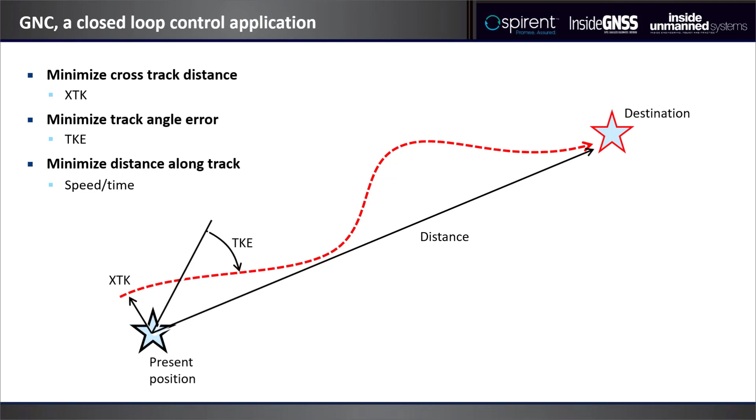And you will see that the most important variables are then the cross-track distance. Are we on the desired path? Then obviously we have the track angle error. Are we proceeding in the right direction? And then finally we have the distance to go, which I drew as a line here, but is actually the distance over the reference path, the along track distance, which is not just the distance, but also the speed and time attributes that we're going to derive from those. So this, in a nutshell, is the guidance, navigation and control system.

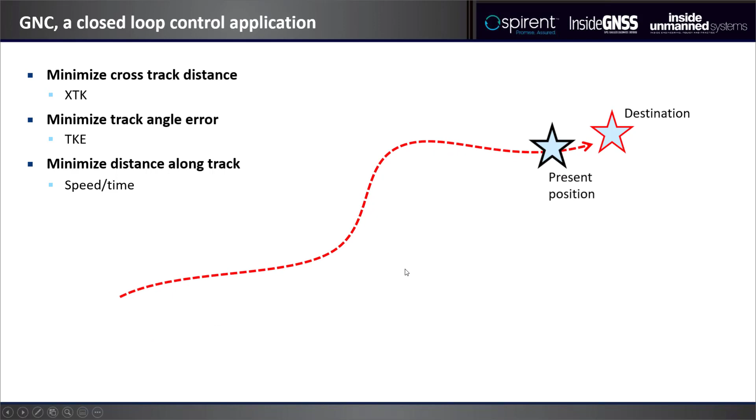And if we are going to make that a bit more formal, then we can show it as a closed-loop control system with at the top the reference trajectory, which is the string of intended positions, the estimation of the current position, which is obviously tied into the sensors. Then we have to generate the control error and bring it down to the guidance and control functions so that it can act on the aircraft in order to influence its current state, and by that the sensors which pick it up and close the loop in that way.

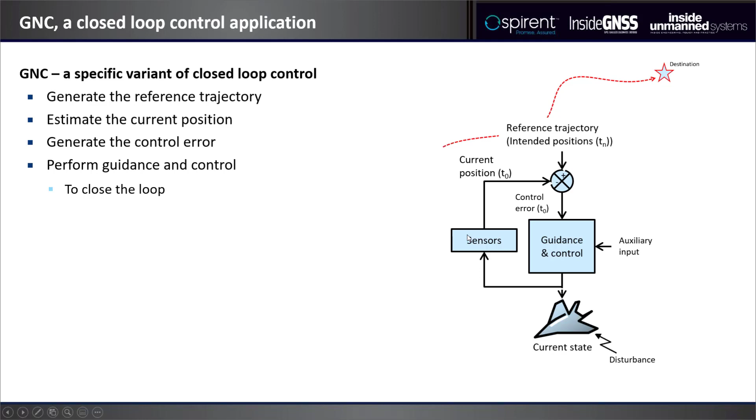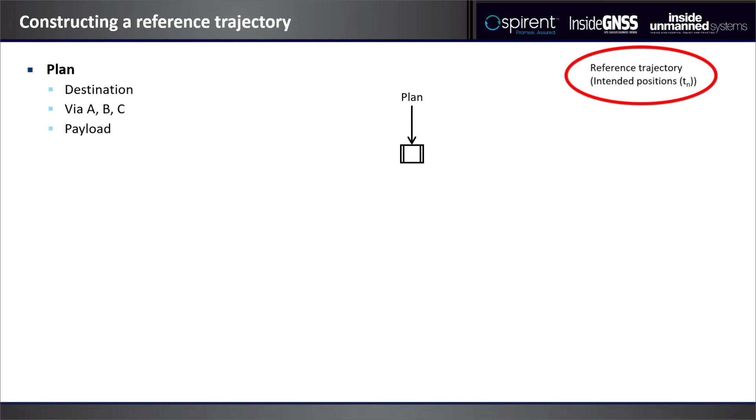Let us think about the reference trajectory for a second. It starts out with a plan, which obviously includes a destination, and then maybe some interim positions like waypoints A, B, and C, and obviously there's a payload. The payload could be a cargo, or it could be a camera that you need to bring somewhere, or it could be another type of sensor or other device. Next, in terms of the reference trajectory, will be the aircraft and engine data that we are going to need in order to refine the plan to a more appropriate set of attributes that allow us to navigate.

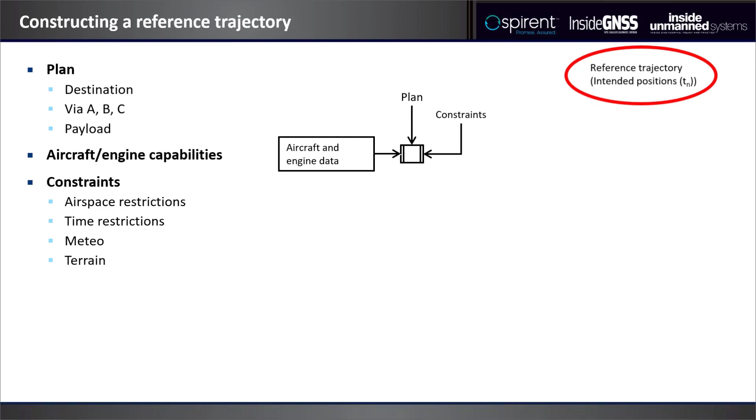Very important are the constraints. There could be airspace restrictions or time restrictions. There could be winds and turbulence or other types of weather, and we have to make sure that they are properly included into what finally becomes the reference that we are going to navigate to. There shall be a navigation database. There are certain points in our navigation problem that we have to have attributes from, like certain waypoints, and jointly we then run a forward simulation whereby we exercise the plan, we respect the constraints, we use the aircraft and engine data, and we generate a reference trajectory.

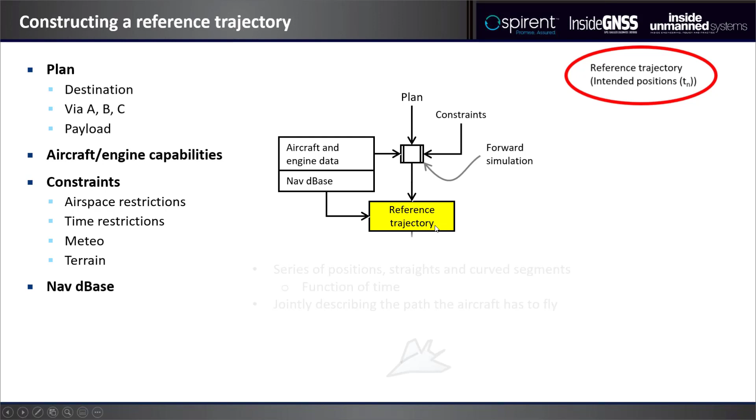And this then is the series of positions and straights and curved segments as a function of time, which then jointly describe the path that the aircraft has to fly. And this is a very important thing. If it is not right, then we will accurately go to the wrong location, which is obviously not the idea.

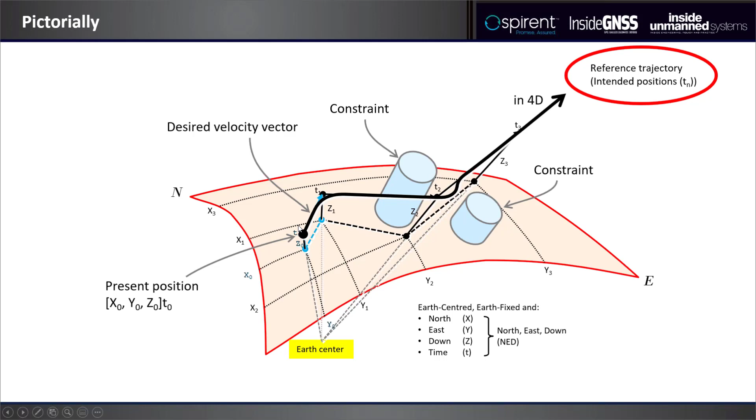To make it a bit more complex, we're navigating over the Earth, which is a sphere, a globe, and therefore you will have to express these coordinates in Earth-centered, Earth-fixed nomenclature, so that our present position, just like any other position, will receive an X, Y, Z and a time. So basically defining those in 4 dimensions. The constraints are similarly expressed in those same types of coordinates. And so that then is the basis for the reference trajectory, which is then in 4 dimensions the path in space that we're going to have to fly. And obviously the guidance and control system develops the desired velocity vector from that and is able to then steer the aircraft along this reference trajectory.

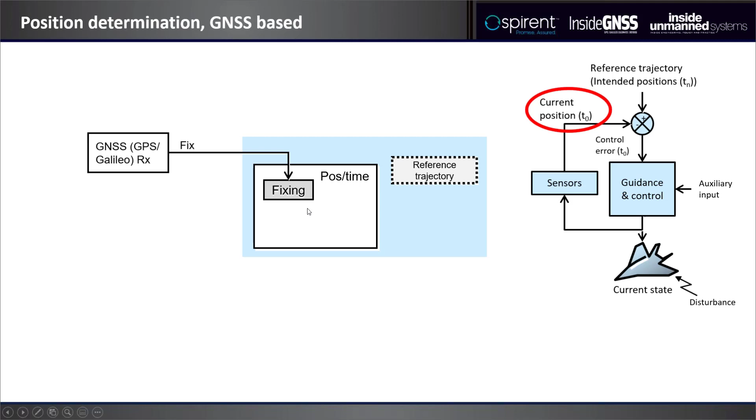So then moving to current position, the reference trajectory, as we discussed, is going to have to be compared, if you will, with the current position in space. And we can then use a GNSS receiver, which is either a GPS or a Galileo, or maybe even a dual constellation machine. And we can decide to then augment that using a space-based augmentation system. And there are other types of augmentation, but this is one.

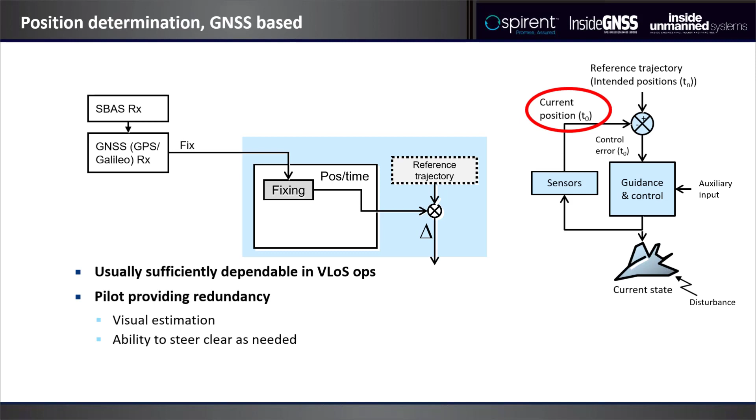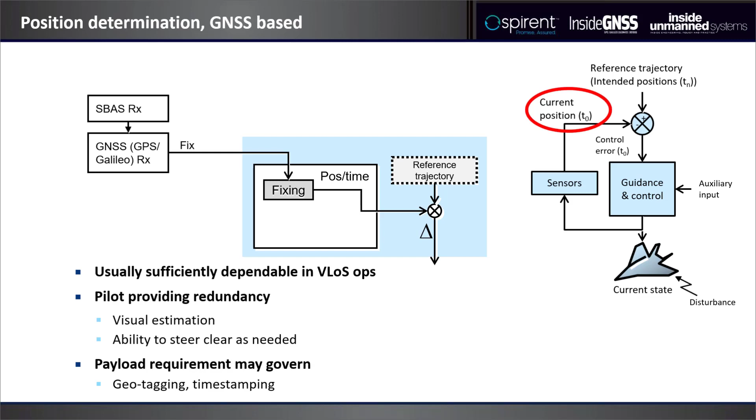And this set will actually produce a fix of where we are, so that we know at that particular instant where the aircraft is. We can then equate that to the reference trajectory, generate the control error, and basically offer that to the guidance and control system. This arrangement is typically sufficiently dependable for visual line of sight operations, and it is because the pilot sees the aircraft and provides redundancy in terms of visually estimating where it is. He is able to steer clear, and the requirements may actually be governed by the payload in terms of geotagging or timestamping or directing a LiDAR to a particular location.

Now, if that is not sufficiently dependable, we can add a dead reckoner, so to say, and we can complement the fixer with the dead reckoning. And in dead reckoning, there's again two shades of gray, if you will. There's one that will use the velocity vector of the aircraft, like air data plus heading and so forth. But then there's also an inertial version where we measure the X, Y, Z accelerations in order to determine how the aircraft accelerates in the X and the Y direction. Obviously, we have to correct for attitude. There's a whole range of other corrections that we'll not dwell into, but this is the primary set of measurements that we have to make, and then we can successfully perform a dead reckoning, which really means that knowing where we start from, we can calculate where the airplane is at any particular time.

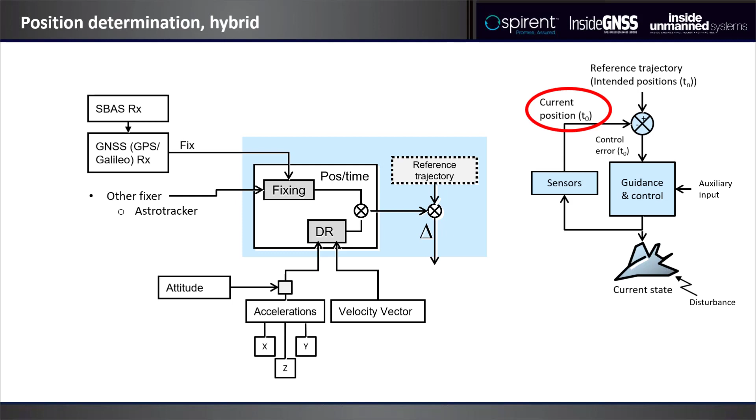And that then can be complemented with other sources of fixing, like a star tracker, for example, or we can have a range and azimuth measurement, such as a VOR, DME, or a TACAN in military airplanes. And in this case, we can create a level of dependability that will actually allow you to go beyond line of sight. Now that the pilot can no longer see the airplane, obviously we're going to depend more on this solution. So this is very much a diagram that you will see that will represent a beyond visual line of sight type of position determination system.

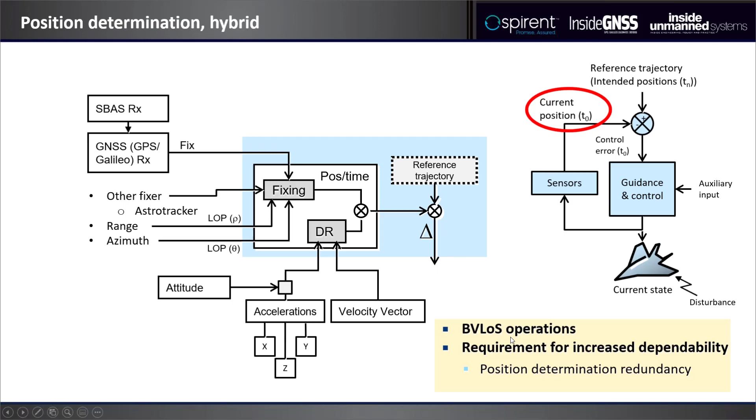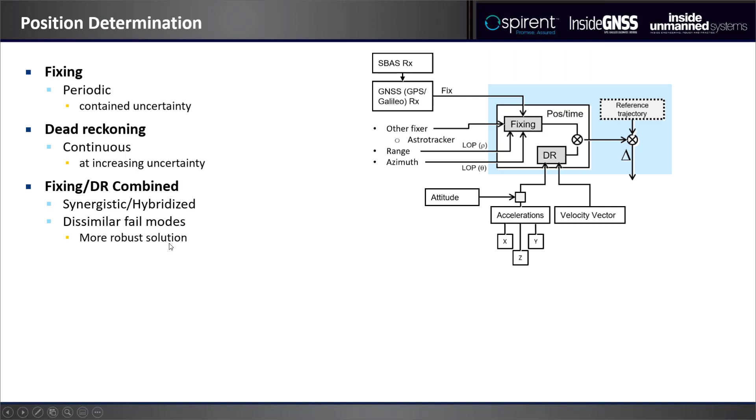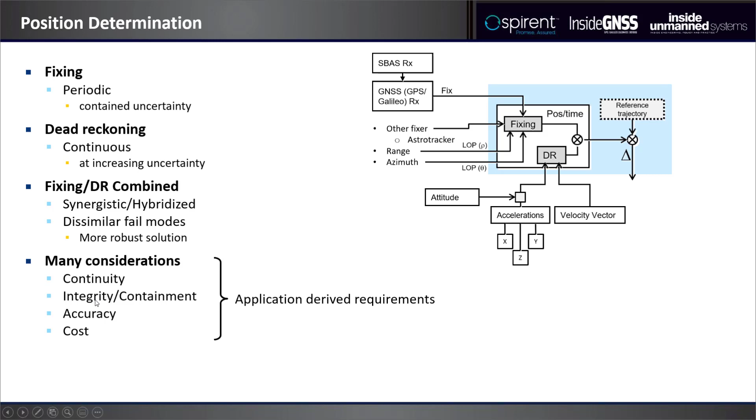Fixing is periodic, but it has a contained uncertainty, whereas dead reckoning is continuous, but it has an increasing uncertainty, since we calculate from where we started and then we integrate other dimensions in order to guess basically where we are. And you can clearly see that the two are complementary. So if we would fix and dead reckon in a combined way and make it a hybridized or synergistic solution, then we have dissimilarity in the failure modes, and we have a very robust approach. And we can immediately see that the application is going to set those requirements. If we do not want to go beyond visual line of sight, we may very well have sufficient from a GNSS complement. Whereas if we do go beyond visual line of sight, we should look for continuity, integrity, and containment of any error, and obviously cost, not to forget.

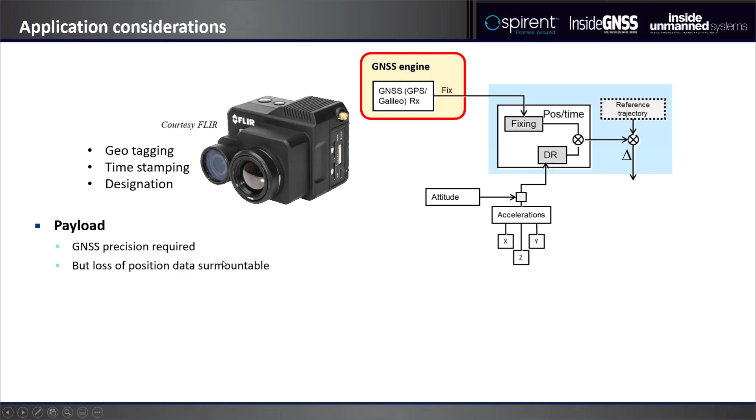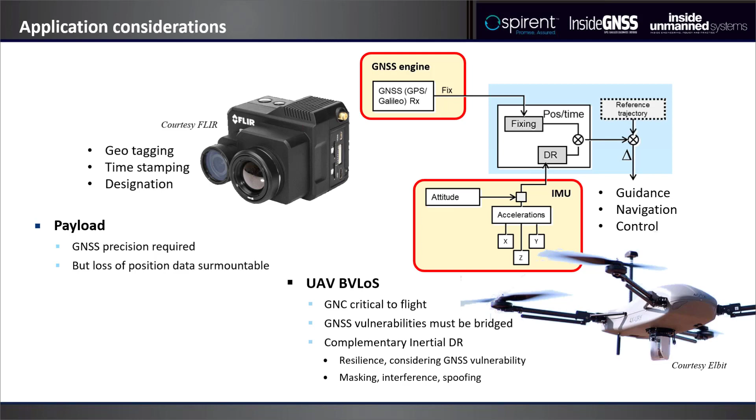So looking at that, if we have a payload like a camera, then obviously it needs to be geotagged and timestamped. We may have designation functions. And in this case, the GNSS engine may be well enough in terms of precision and even in terms of integrity. And if there is a loss of data, then that is typically surmountable. However, if steering the airplane depends on it, now if we lose the GNSS engine for reasons of multipath or spoofing or anything, then we might lose control of the airplane, and that would be a much more serious situation. So in that case, we would try to use the combined set of fixing and dead reckoning in order to make sure that this set can be critical to flight and that the vulnerabilities inherent to a GNSS are bridged, and that we use a complementary set to basically achieve the level of dependability that will get us through masking and interference and spoofing.

So let us go to guidance and control, having talked about current position. Guidance and control is the next important function, since it has to be consistent with vehicle dynamics. It has to be consistent with the position determination frame rate and with the disturbance spectrum.

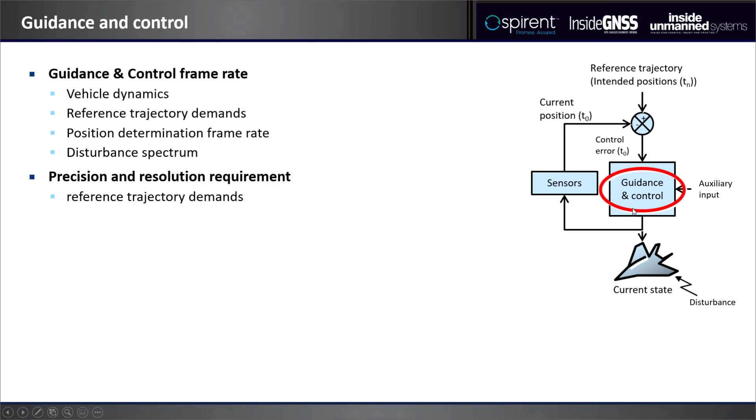Obviously, precision and resolution has to be consistent. Otherwise, we might know very precisely where we are, but we cannot get the aircraft to go there. And so these things are all, I should say, equally important almost, and they have to be properly integrated.

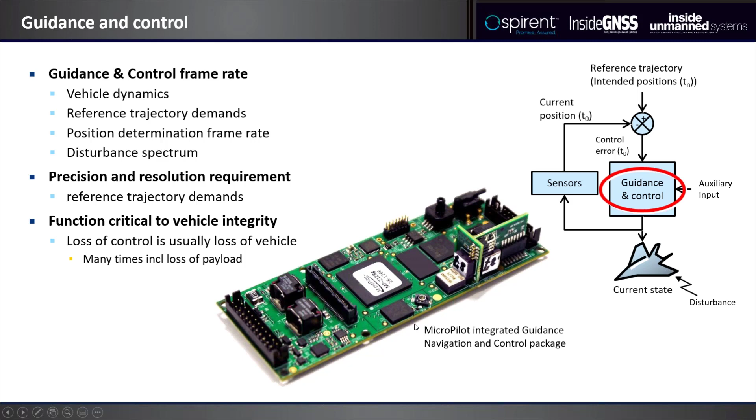So talking about error mechanisms, uncertainty and accuracy, the reference trajectory has to be correct, and it has to be valid. If it is not valid, then we are going to go to the wrong location. Then again, once it is on the aircraft, it has to be intact. It has to stay intact. So the database cannot lose integrity. We cannot corrupt the processing.

Guidance and control. Cycle time is very important. Rounding and truncation is important in order to make sure that our control authority is in lockstep with what we should expect in terms of disturbance, but also what we expect from the demands of the reference trajectory.

And then obviously the sensors, the current position, the GNSS has to be designed such as to be resilient against the main issues associated with such a high frequency machine, masking and interference, spoofing not to forget, and that might point to the need for redundancies to make sure that the error accumulation is kept inside acceptable boundaries.

Now these three main areas are defined as the path definition error, the flight technical error, in other words, the ability to keep ourselves on the reference trajectory, and then the navigation system error, which is the key in the PNT discussion that we are treating here today. And jointly, they produce the total system error as a vehicle altogether.

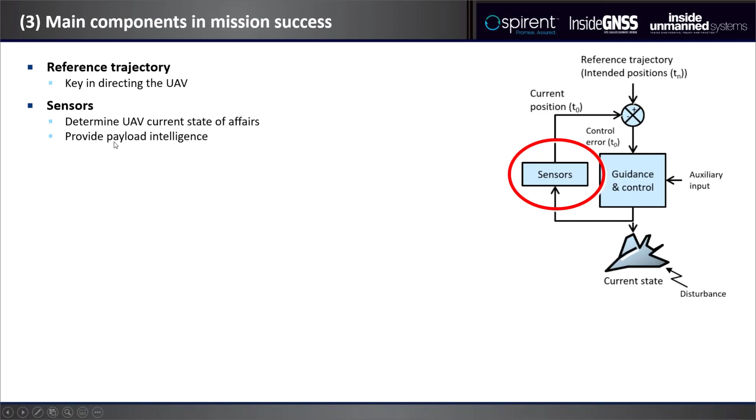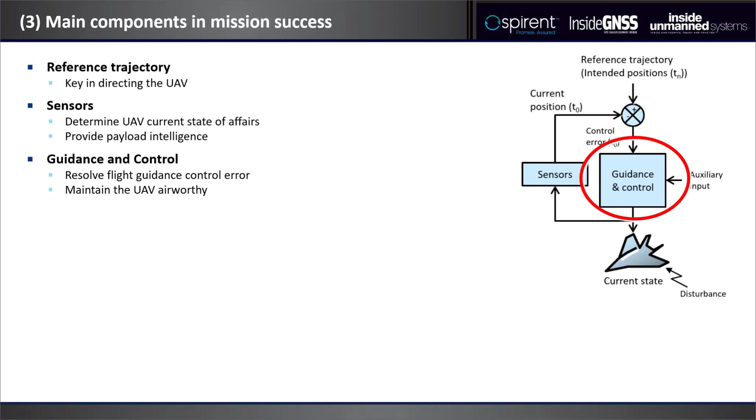So, in summary, the reference trajectory is very important in directing the UAV. The sensors obviously have to determine the current state of affairs, and they provide intelligence to the payload. The guidance and control function resolve the guidance and control error, and they maintain the airplane airworthy. And then obviously there are corresponding errors and uncertainty contributions in actually all of the aspects that we have discussed.

And we can clearly see that the preferred combination is very much mission dependent and to an extent aircraft dependent. But the mission and its environment is the one setting the yardstick for all of these applications.

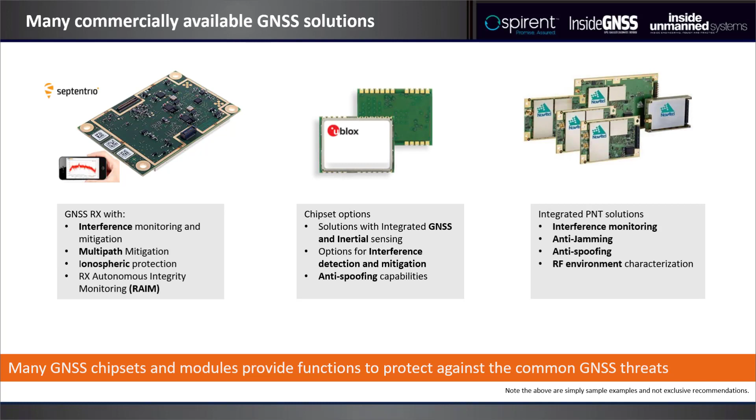But it doesn't stop there. Most of the GNSS chipset providers provide a GNSS, and some of them are fusing with inertial, but what they all have is these really great APIs where you can go deeper. You don't just have to use the flags that they send that you can read and poll. You can actually go deeper and look at the data that the PNT engine is receiving, and you can use that to your advantage for quite low cost at the software layer within your system. So you don't have to pile in additional hardware and complexity. It's just about using more of the data that is provided to you.

And here's an example here about using these APIs and thinking about it. Well, if you think about spoofing for a moment, rather than just accepting a spoofing flag, what you could do is read the navigation data that your PNT engine is seeing from the satellite signals that it sees through the number of channels that you have, and look to compare it. Most spoofers don't provide a full suite of navigation data. They're interested in trying to fool the system into locking onto their signal, but they can't easily sync with live sky and reproduce all of that navigation data. So you could just do a compare, look at all the channels and see, have I got outliers?

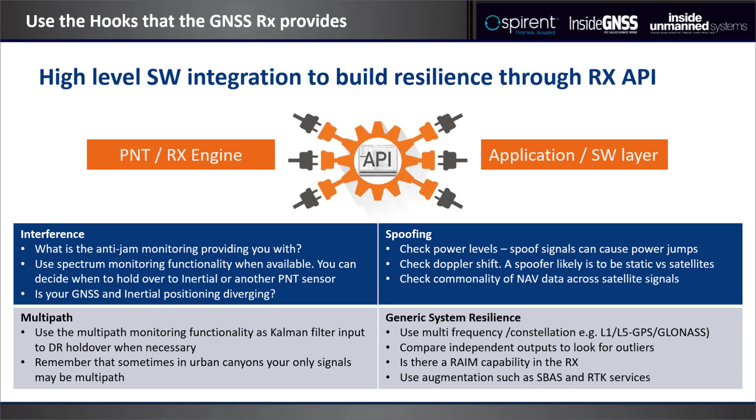You can also read the Doppler shift measurements. A spoofer is probably unlikely to be traveling as fast as a GNSS satellite and should have a different Doppler measurement coming from them. So that's just an example of spoofing, but again, multipath, you can read that and make decisions about when should I hold over to dead reckoning and inertial. The same for interference. Use the data that your PNT engine gives to you, take it up to your software layer that you're integrating, and again, for relatively low cost, you can build these layers of resilience into your system.

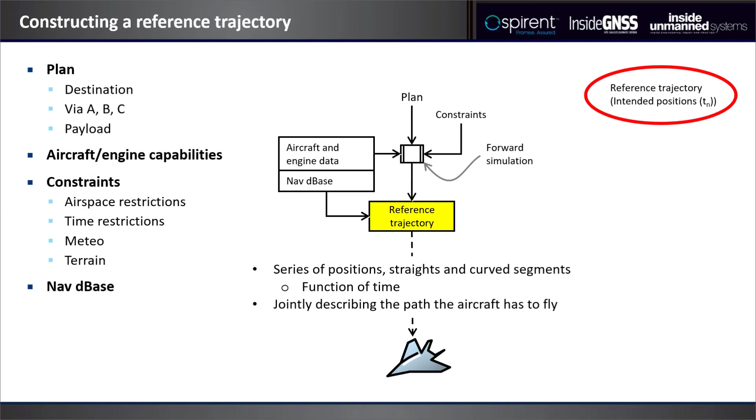The reference trajectory obviously has to be flown by the aircraft, and therefore it must match its performance. For example, turns are bank angle and ground speed dependent. A commercial aircraft may normally have limitations for passenger comfort, which then turns out to be a limitation in the bank angle. Likewise, ground speed depends on several performance factors. To give an example, a large aircraft, a 737 class aircraft, has a turn diameter in the order of 8 miles at cruising speeds, whereas a small and more agile drone could have a turn diameter of a few feet. And obviously we'll have to recognize that when constructing the reference trajectory.

The other thing is, are we going to pass a turn change point overhead, or are we going to fly by it, so to say, making the curve inside the next straight segment? And then we will have to estimate what that means in terms of curve diameter and how we have to terminate the turn and rejoin the next straight segment. The same applies in the vertical for climb segments, the available climb performance, the lift drag properties, the load limitations.

And so if we would define the reference trajectory without considering those aspects, then in the worst case, the airplane trying to fly it would start to build up error, and there would be no option to recover. And that is the main reason. It is to make sure that we have a reference trajectory that is totally reasonable and that will actually allow it to be flown without error contributions. Alan? Thank you, Akko.

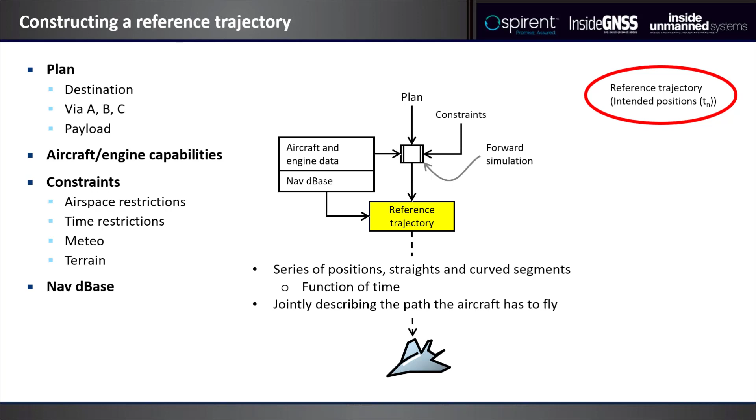Yeah, in fact, accuracy is always in relation to a known, let us say, beyond question reference. If we are on it, then we are okay. If we deviate, we call that error. But once we're on the airplane, we don't have such a reference. And in addition, the measurements that we make scatter. Like watching a star and seeing the star twinkle, you could, fundamentally speaking, not decide where the star is until you take a long-term look and average the twinkling. So if the scatter distribution is narrow, then we are inclined to believe that the error is low, even though we don't know for sure.

Just like Adam just pointed out, we could have systematic errors induced by spoofers, for example. GNSS observations scatter. The scatter distribution now tells us the confidence that we may place, and that is why next integrity is very important. High integrity means that we have few hidden and unmonitored faults, and thus we may depend on it, and vice versa.

So in airborne navigation accuracy, the three strongholds that we have is, first of all, the reference trajectory. Let us hope it is good and valid. The second thing is a narrow scatter distribution of all the sensors involved. And then finally, solution integrity. And the integrity is, in fact, one of the cornerstones of the whole solution, so that we can decide to use the data as it is meant to be. Thank you, Alan.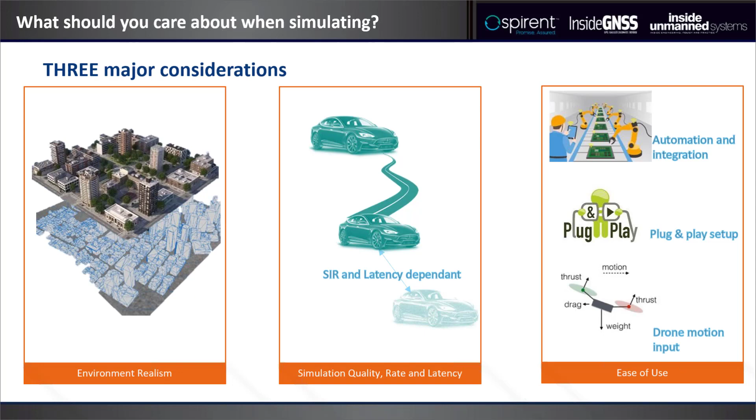And then the final one for me is to say, well, if you're mission planning and thinking about flying in an urban area, for example, being able to simulate also gives you a level of ability to kind of forecast the performance that you may expect at a particular time during the operation of your UAV beyond visual line of sight in a specific environment. So just something else to think about with the mission planning that you could undertake before operations.

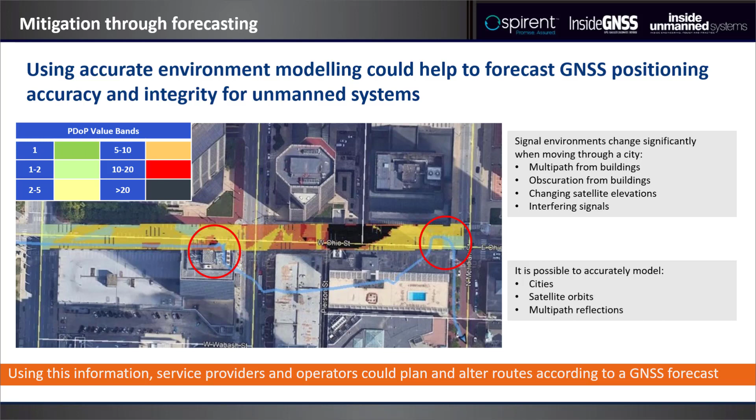Meanwhile, we're going to go now to Howard Loewen, president of Micropilot, with 27 years of experience as owner, founder, and chief executive officer of the firm, which is a leader in professional autopilots for UAVs and drones, an ISO 9001 certified autopilot manufacturer that markets single board autopilots, enclosed autopilots, and a triple redundant autopilot.

Micropilot offers a family of lightweight UAV autopilots that can fly fixed-wing, transitional, helicopter, and multi-rotor UAVs. The company also provides complementary products such as the Extender, SDK, and True Hardware-in-the-Loop 2. Micropilot autopilots have been purchased by more than 1,000 customers in 85 countries. Howard holds a master's degree in computer science from the University of Waterloo. Howard, please tell us about autopilots and simulation.

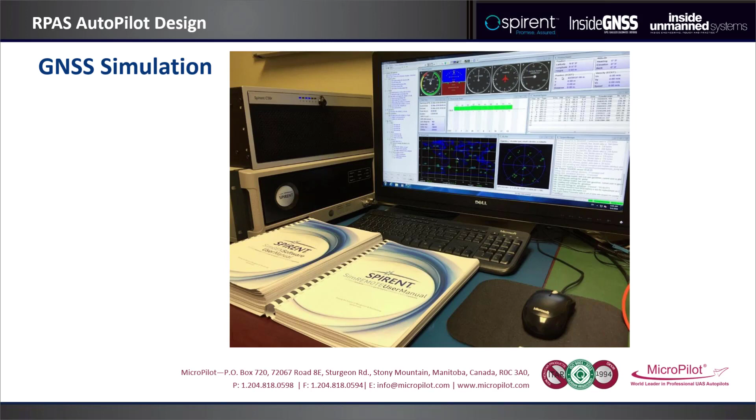And so using this simulator and a number of test processes we came up with, we were able to project 6 months forward into the future, run some simulations, and show that neither our autopilot software nor the software in the GNSS receiver we were using were going to experience any adverse effects.

Another place where a GNSS simulator comes in handy is with multipathing. So multipathing occurs when the signal from a satellite does not take the nice straight path to the receiver, but instead bounces off something else. And when you start to experience a multipathing event, you get these sudden jumps in position. Now, the GNSS receiver will give you some indication that you're experiencing multipathing, but also you can see this by comparing your inertial navigation system to the output of your GNSS receiver. Suddenly, there'll be a big difference between the two.

Now, in our software for Autopilot, we do a lot of work to recognize a multipathing event. We do a lot of work to try and mitigate it while it's happening, and then recognize when it's over and make our solutions converge again. Now, this is really hard to test in the real world. You can go a long time in your test program without experiencing a multipathing event. So it's much easier if you can generate these events in a controlled environment with a GNSS simulator, and then use that to prove out the operations of your algorithms.

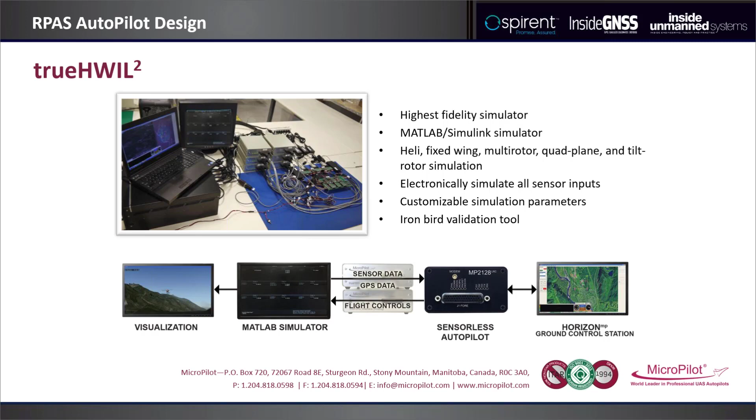So we can use this simulator in two configurations. In one configuration, one of the sensors we remove from the Autopilot is the GNSS receiver. And we'll have a block in our Simulink simulator that generates the same packets as the GNSS receiver. However, sometimes we want the receiver in the loop in the simulation.

And so then what we do is we replace the block in Simulink that generates the GNSS packets, and instead we send the state information of the UAV to the GNSS simulator. So the position, the velocity, the orientation, and the time. Then the GNSS simulator will generate the RF that the satellites would generate for a UAV in that state, and then we output that into the antenna of the GNSS receiver.

And now the GNSS receiver is part of our test. And there's a lot of different tests you can run with this. For example, sometimes we run month-long flights to make sure there are no cascading errors in our software or in the software in the GNSS receivers that we're using. And as you can imagine, to fly for a month would be pretty tricky, but in the simulator, that's quite straightforward.

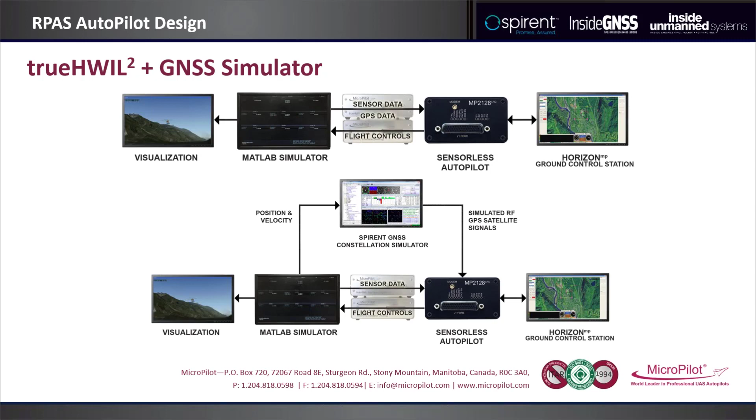Now, in production, GNSS simulation also has an important role. Our Autopilot includes a GNSS receiver, and we want to make sure that the GNSS receiver on all our Autopilots is working properly before we ship them to our customers. Now, we could just take that outside and test it under the open sky, but unfortunately, then we don't have a known signal strength, and so we couldn't be as precise on the signal-to-noise ratio we expect from a properly functioning Autopilot.

So making use of a single channel or single satellite GNSS simulator gives us that known signal strength signal. So we just take the output of this and we connect it to the RF input on the GNSS receiver, and for every Autopilot, we know the signal strength of the satellite that we're supposed to be checking for.

Now, when you get into designing a drone, you're taking a whole bunch of transmitters, everything electronic is a transmitter, and you're placing them very close to your GNSS receiver antenna. And so it's no wonder that sometimes there will be problems with interference. And again, you can try and resolve these interference problems under the open sky, but then you don't really know if you're making it better. Just because the signal-to-noise ratio you're reporting today is better than it was yesterday, that could be because of the changes or the improvements that you made, but it also could just be because the satellites are in a better position.

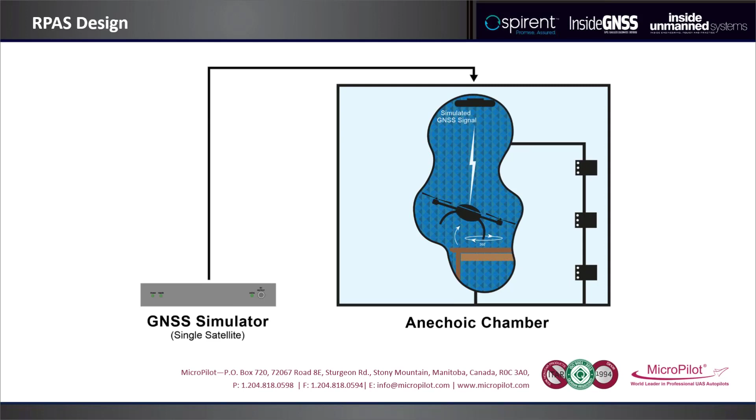And finally, once you're in production, it's important that you check every drone before you ship it to your customers. And again, you can do this under the open air, but it's much better to do it in a controlled environment with an anechoic chamber and a known signal strength signal for the GNSS satellites. So this is how we use GNSS simulation at Micropilot and how we think that it can benefit our customers. And we believe that this is the sort of thing that the regulators are going to be looking for to allow you to prove the reliability of your system.